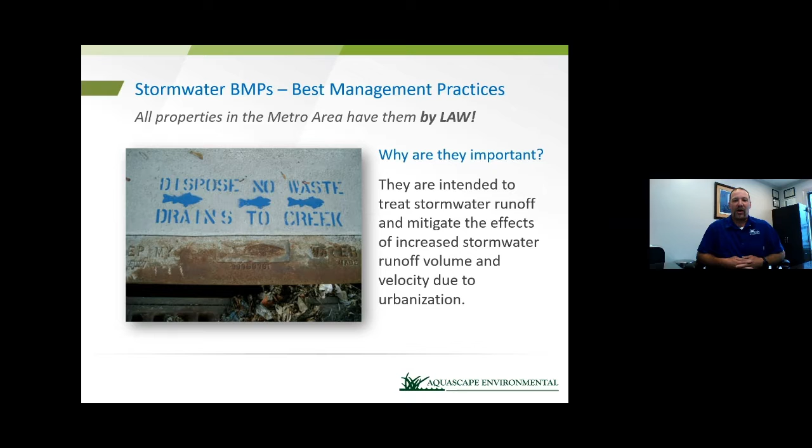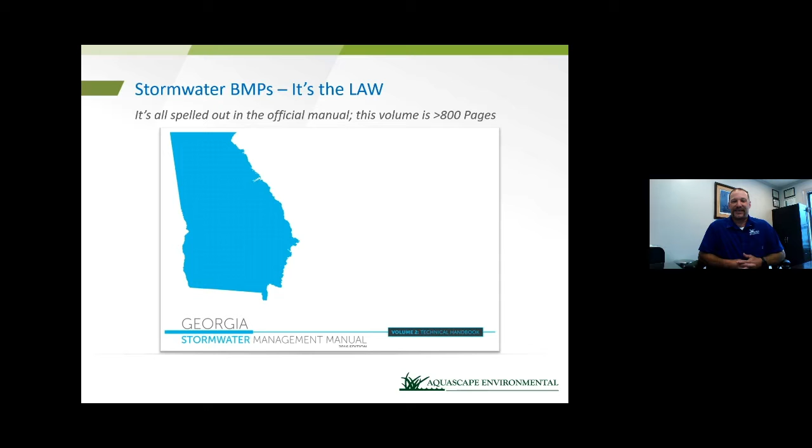Next slide, please. If you really want to get into it, as with everything government oriented, there is the official, they call it the Blue Book, the Georgia Stormwater Management Manual. There are several volumes, and you're looking at well in excess of 800 pages. It will spell out everything you would ever want to know and probably don't want to know about stormwater management. That's where it helps having a professional come in and assist you with this process, because that's kind of what they do and we do - we know the ins and outs of that process, and you don't have to go figure it out for yourself. Next slide, please.

But this notice to comply basically says that someone from the county has come out. There is some manner of either deficiency or notification, and they need you to address those deficiencies to bring the stormwater practices up to compliance.

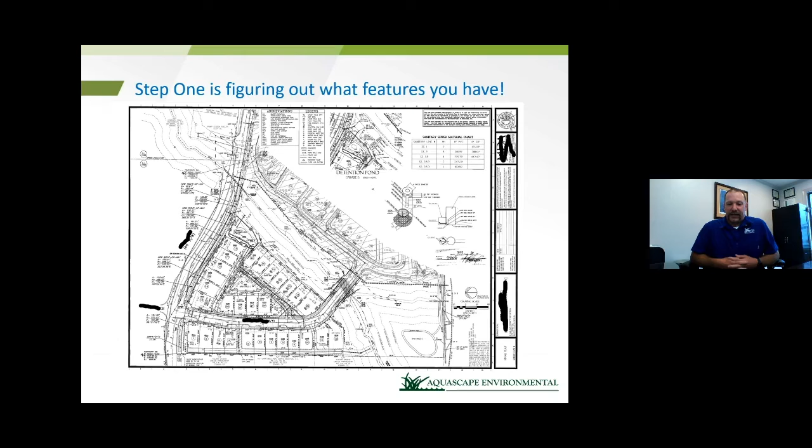So getting to the nuts and bolts of it, where we said it's very important, these are the two most common stormwater features that we deal with anywhere. And they are detention ponds and retention ponds, and unfortunately a lot of people use these terms synonymously. But they're very different. A detention pond, like it says in the slide, if it's a D, if you can remember the D, it is meant to be dry.

That means after a storm event like we had at the office today, within 24 to 48 hours, that pond should drain dry again. A retention pond is always going to have water in it to some certain elevation, except maybe in extreme droughts, but it will always have water in it. Now, the thing of it is, you can see in the slide, both of these have concrete dams, both of them have fences around them and all that, and concrete outlet control structures. So they look very similar, but the intentions of them are drastically different.

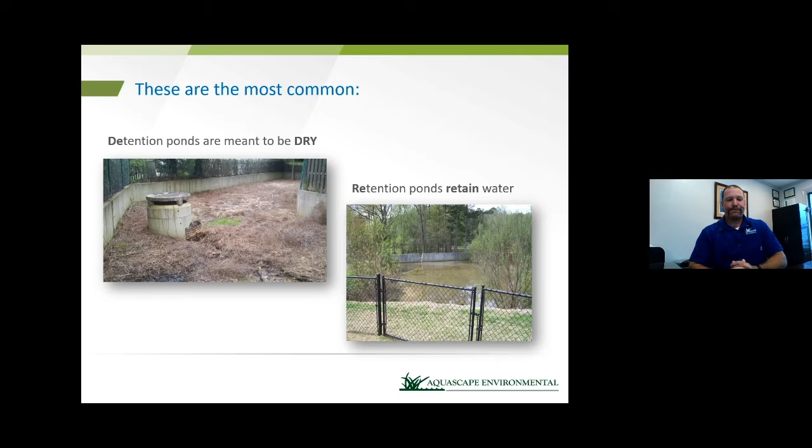Next slide, please. We said here the two most common are detention and retention ponds, but we listed a few more here that just kind of shows you that the inspection process, having a professional come out and inspect your stuff, it's not always just surface ponds. That's what's front and center, and a lot of people see those because they take up a lot of real estate in communities.

But you've got underground detention vaults, which are really big inside the perimeter in Atlanta. Hydrodynamic pre-treatment filters, those are becoming pretty prevalent. Stormwater baffle filters, bioretention, green roofs, all kinds of low impact development type stormwater infrastructure. So having a professional that can come out, even if you don't have a set of plans, they can come out and walk and assess your community, and really kind of do, for lack of a better word, a bit of sleuthing, and kind of follow the water and follow the gradients, and they'll find most of this stuff for you.

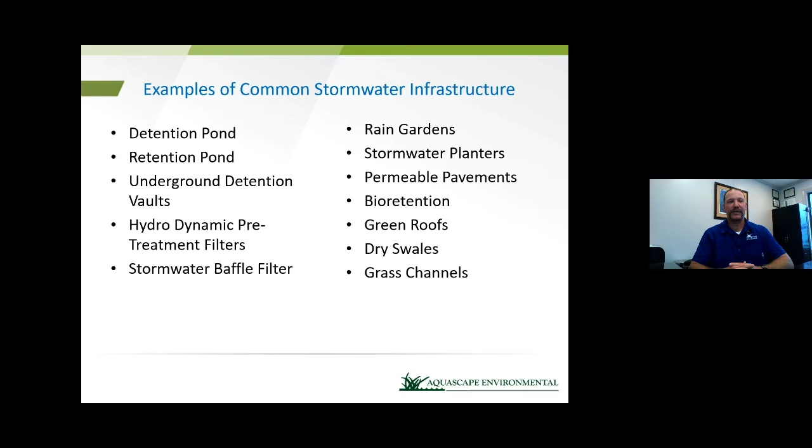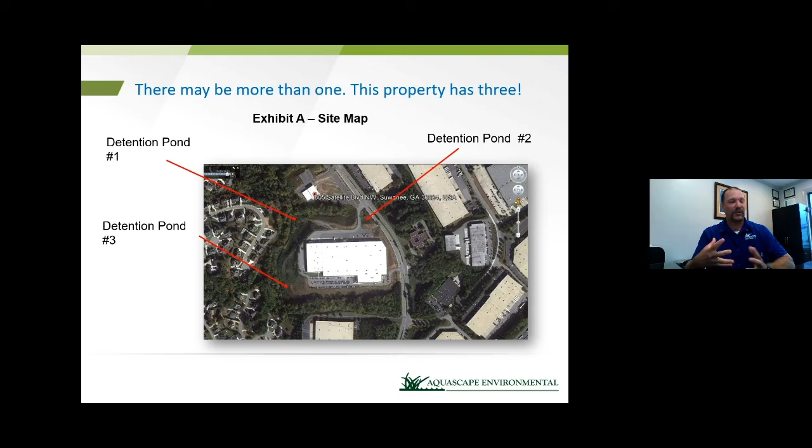Next slide, please. Like I said, be cognizant that there might not only be one structure that you're having to deal with. This is one building that is a customer for us, and it's a commercial property, and this one building has 3 large detention ponds because it's a massive warehouse. It's a little hard to see in the Google Earth there, but this is a big manufacturing type facility. And so you have 3 detention ponds, all in close proximity around the perimeter, but all 3 of those would have to be inspected separately and made sure that they're functioning properly to avoid any issues with stormwater backups or non-compliance with the regulatory community.

Next slide, please. Like we said, having a professional being able to look at this, these are becoming more and more prevalent. When space is limited, they put a lot of these things underground.

There are some different nuances to underground things, but at the bare root of it, whether it's an underground detention pond or a surface detention pond, they're the exact same. One just happens to be underneath a parking deck, a building, or sometimes a roadway, but it serves the same function as a surface pond, just saving space.

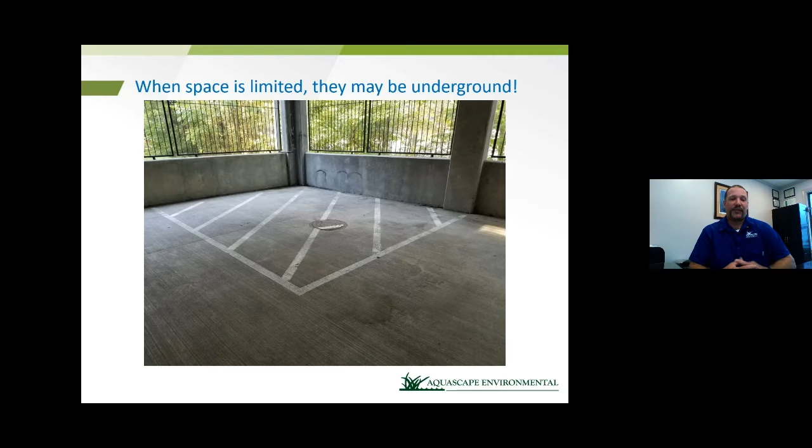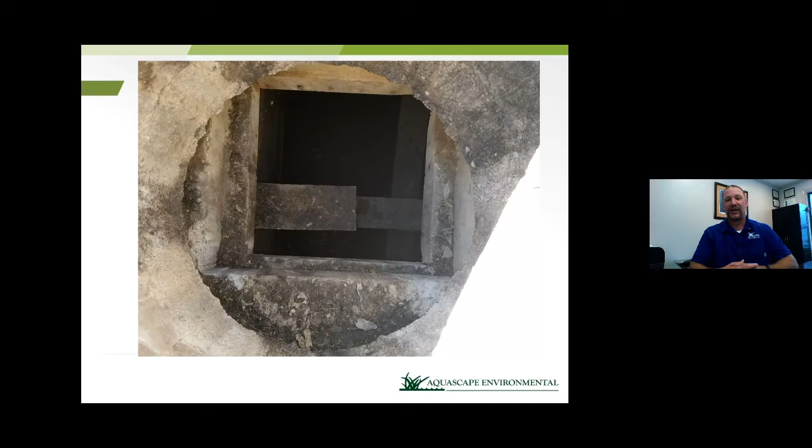They have their own complications for underground stuff. As you can see here, this is the only way in and out of the underground vault. It's a detention pond, and the weir structure in the middle is the outlet control structure. Any maintenance has to go through this manhole, so it has its own complications. Unfortunately, with these underground systems it's out of sight, out of mind. If you're not inspecting them regularly, bad things can happen because water backs up and people don't know about it until it's flowing out into the roadways.

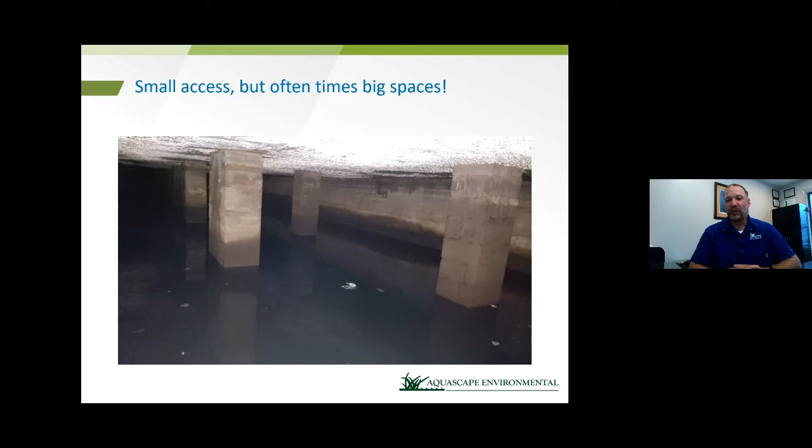So step 2, whether it's a regulatory agency or a private consultant like us, the way it's written in the Blue Book, you should be having a formal annual inspection of your stormwater features. You should look at them, preferably more often than that.

The book says you should visually look at them after every rain event, but that's a lot to put on your HOA president or even a building owner. A lot of times these are pushed off to remote portions of a property, so getting down into them every single rain event doesn't necessarily happen, but we really recommend, if nothing else, a once-a-year formal annual inspection.

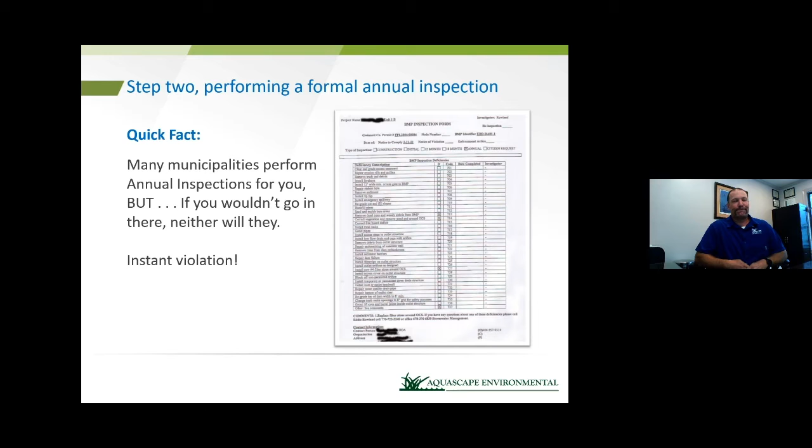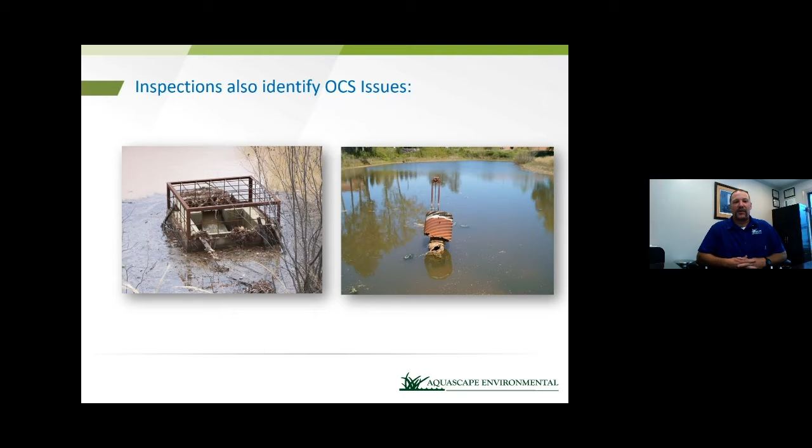The inspection process obviously is not just about vegetation, it inspects things across the board. One of the big things is the OCS, you'll hear that term a lot in this talk. It stands for outlet control structure. Basically that's the nuts and bolts of your stormwater pond, or really any stormwater control, because we're backing up or retaining water on a property and releasing it at a controlled rate. You need some type of structure to do that, so they will inspect those as well to make sure they're functioning.

I always tell new HOA communities or property managers taking over a community from the developer, this is one of the biggest ones. You want to have an inspection of those stormwater ponds before you sign off from the developer, because a lot of times that stormwater pond is serving as their sediment pond while they're building the neighborhood. If they haven't cleaned it out, as soon as you sign off, it becomes your responsibility. We can try to go back and get them to help, but good luck with that, unfortunately.

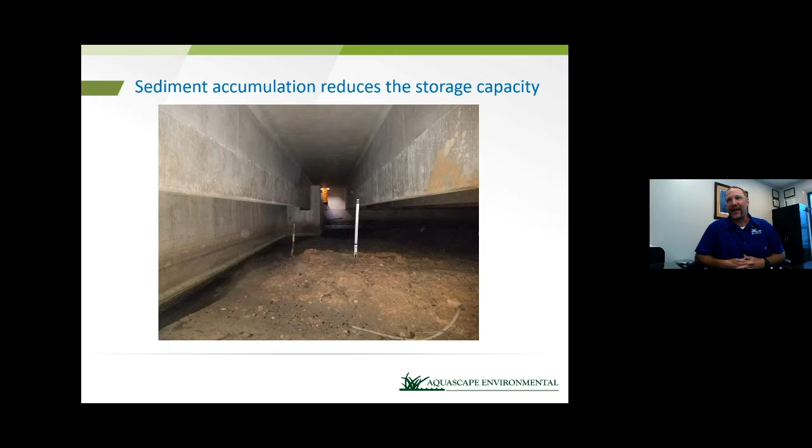Unfortunately, we live in an urban society. This is one of the big things even in our normal lake management duties that our guys deal with on a day-to-day basis. Stormwater features, especially your surface ponds or retention ponds, think of it as a bathtub. Everything that flows into there stays in there. The water can go out, but everything that goes down the drain gets caught in the pond, and a lot of times that's just bulk floatable trash and man-made trash.

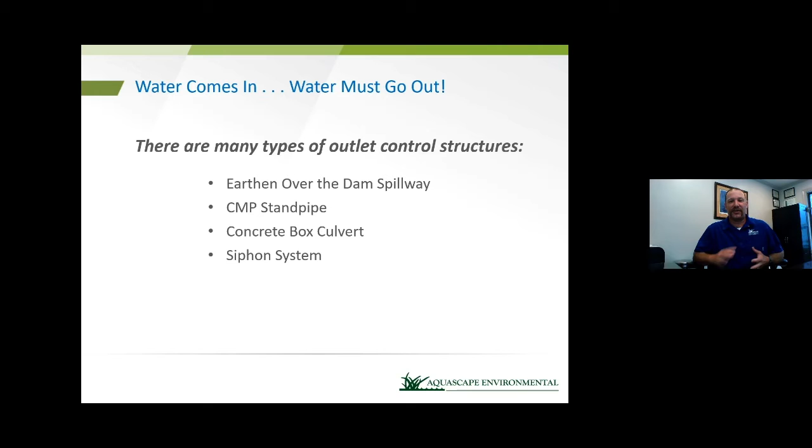There's all kinds of different outlet control structures. They can be corrugated metal pipes. You see a lot more concrete now because it lasts a little bit longer. You'll see PVC and poly extruded pipe that they're using now, which also lasts longer. But we still see a lot of corrugated metal pipe too, because it's also the cheapest option. But maintaining those spillways is critical. Key one, start there. If it's clogged up and they tell you it's holding water, we got to get the water out. Next slide, please.

But if we go back to our high school science class, a gallon of water is roughly 8.5 pounds. Most of your ponds, in the water industry, we deal with acre feet. So a foot of water over an acre, or 2 feet over a half acre, is an acre foot. An acre foot of water is 326,000 gallons of water. So you multiply that by 8.5, you could think of the weight. If you just have a foot extra of water on top of that outlet control structure because it's clogged up, the amount of weight and pressure that is placed on that system by simply not maintaining it correctly is, like I said, water finds a way and it will find the weak spots.

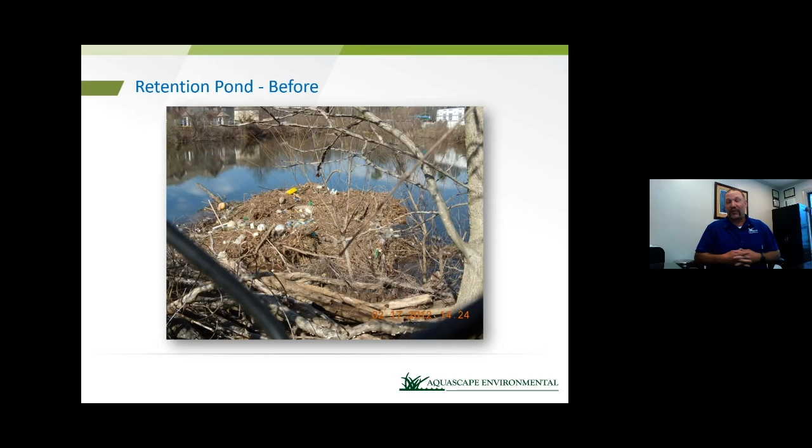Next slide, please. Just another example. This is one we got a call from this pond. We actually have started maintaining this one on a regular basis. This is in downtown Atlanta. They couldn't understand why the roadway was flooding after every rain event. Next slide, please. Exact same place.

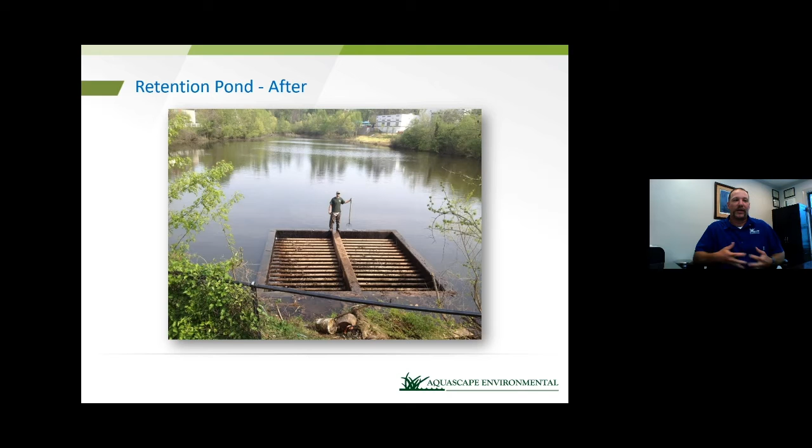This was actually an apartment complex that had changed property owners over the years, and they didn't even really know that this was there because it just had gotten covered and forgotten about. Again, that goes back to the importance of having these things inspected at least on a once a year type basis. Next slide, please.

Anybody was around the 2009 floods, historic flooding? Ignoring your spillway can be a big liability when roadways are involved. This was one of the pictures where we had to respond in 2009. In the upper center, you can kind of see a debris pile there. That's where the spillway is. It found a way through the dam and washed out this roadway. Unfortunately, in this case, this was the neighborhood's road. It was basically in the center of the community. It was a several hundred home community, but they owned the road.

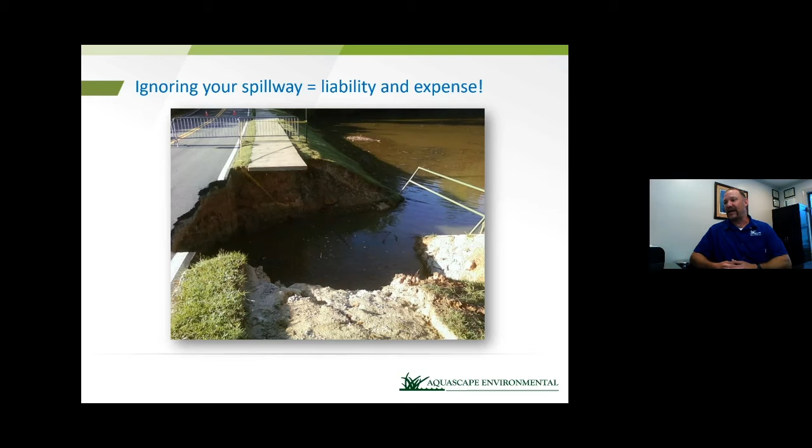I mean, this is a massive expense. Now, luckily, the city stepped up and shouldered a lot of it with them and helped them out. In some places, like City of Roswell, they don't allow dams to be roads anymore because of situations like this. But you can think of the expense, and all that came down to was not maintaining the spillway. Next slide, please.

We get asked a lot: can we just leave it flooded? It looks better. This isn't the best example, but we have a good before and after on this one. This is supposed to be a detention pond, but when it flooded with 5 or 6 feet of water, now they've got somewhat of an amenity. They'd rather see a pond there than just a vegetated dry basin that a detention pond would be.

But unfortunately, detention ponds and retention ponds are fundamentally different when it comes to construction. A dry detention pond is only supposed to hold water for 24 to 48 hours, so the developer doesn't have to put as much engineering and detail into the dam structure itself because it's not supposed to hold water for very long, whereas a retention pond is.

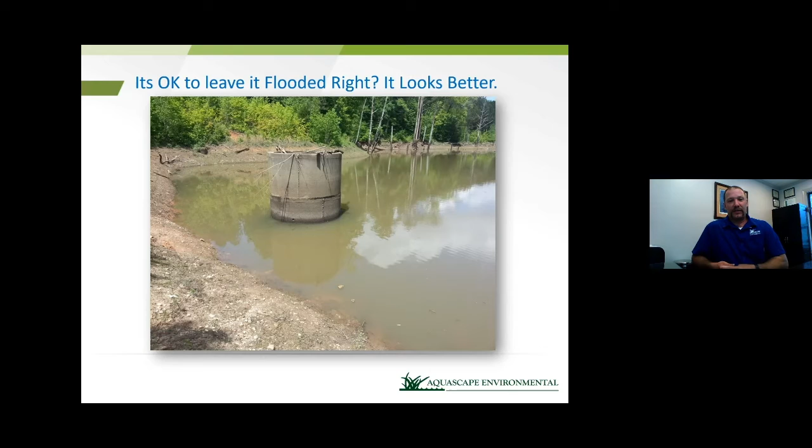When you leave them flooded, this is the same place, and this is what happens. Basically, the entire dam catastrophically failed. Water found a way, had to get out, put a lot of pressure on it. Monday, at least up here in Woodstock, we had 4 inches of rain in several hours. It was just a massive amount of downpour in a short amount of time, and the dam just couldn't take it.

I can tell you from experience of having to repair these, fixing a dam when it gets to a situation like this and fails is very expensive. What a lot of people don't think of is that all that dam material went somewhere. In this case, it went down to their neighbor's pond. So they not only had to pay to fix the dam, they also had to pay to get the sediment out of their neighbor's pond. Almost a double whammy of expenses for something that basically could have been avoided if they'd just maintained the spillway a little bit better.

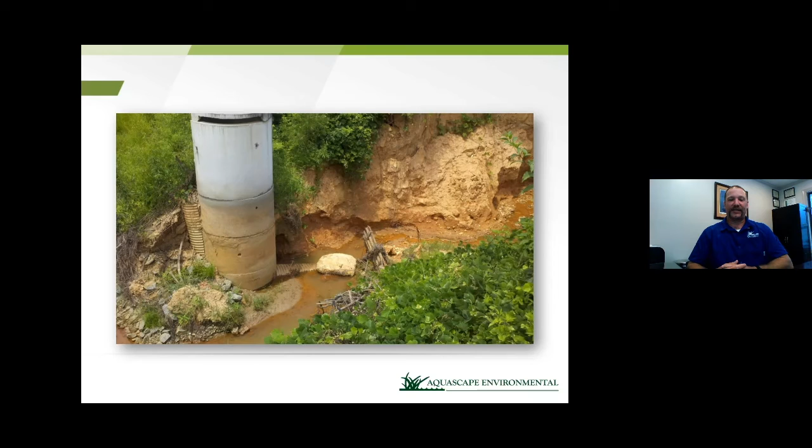A lot of people see concrete spillways. Even concrete spillways, if they're meant to be dry, are built a little bit different than the concrete dams meant to hold water all the time. In the case of this one, it simply fell over. You're talking a big expense. Concrete's not cheap nowadays, especially the way we're building roads and all that, and even finding it is hard, but repairing something like this is quite costly.

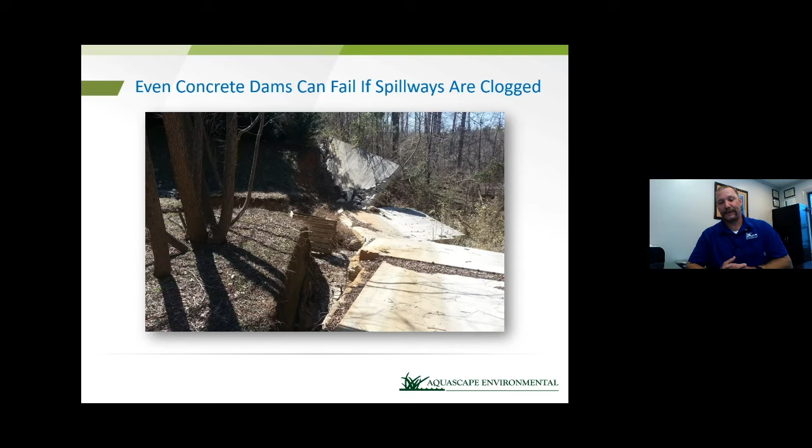This is a little more common with concrete detention ponds. Water just goes underneath them. The pressure finally gets through because they don't have to pour the footings as deep for a dry pond, but repairing this after the fact is also difficult. They kind of have to inject concrete and patch it up from that respect.

The spillway is not the only thing, but you also got to consider the BMPs. Like anything, like your car, brakes have to be replaced, tires, flush the radiator from time to time. A stormwater feature is the same way. We've got to remove the trash, maintain the vegetation, and the BMPs, or best management practices, that control the water leaving that site, those have a lifespan as well.

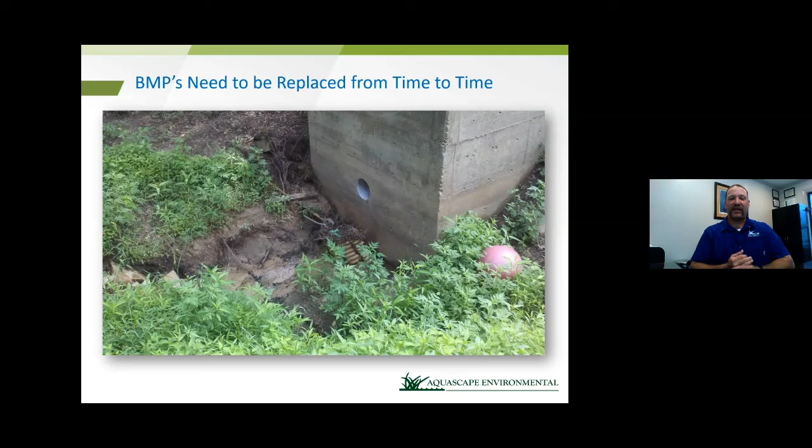It just takes maintenance from time to time. That's the same structure - they've got fresh rock in, they've removed some of the sediment, they've reinstalled the metal half-round retrofit on it, and now this thing is functioning properly again.

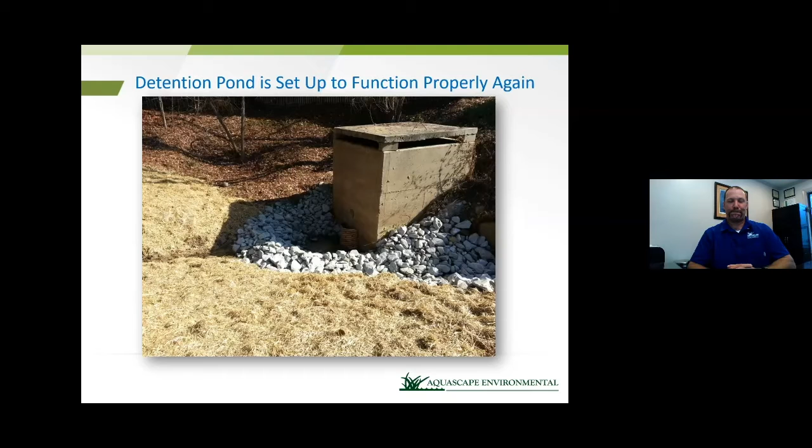After we've dealt with the spillway and the BMPs, the next thing you want to address is infrastructure issues. A lot of times that's aging pipes. Unfortunately, we still see a lot of corrugated metal pipe - it's the cheapest. I hate to say that, but the cost difference of that versus reinforced concrete pipe is pretty dramatic. So if you can get away with it... but this stuff has a lifespan, manufacturers generally say about 25 to 30 years. So older communities, you've got to look at these pipes. This stuff can be repaired in place in most cases, but once it fails, a lot of times the only way to fix it is to pull it up, dig it up, and replace it.

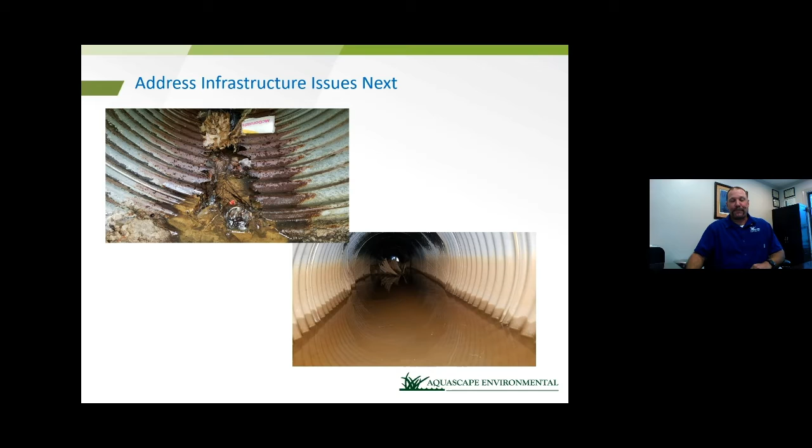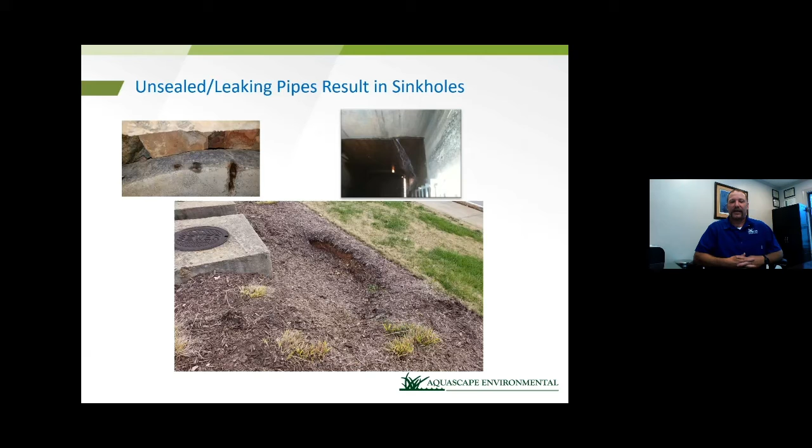A lot of times those failing or leaking pipes, especially like the bottom picture there that's underground, present themselves as little leaks over time that end up showing up as sinkholes, soil loss, or piping around structures. Addressing those on a periodic basis, a lot of times that's just hydraulic cement that can seal up those leaks, and fixing it early can avoid a big expense later down the road.

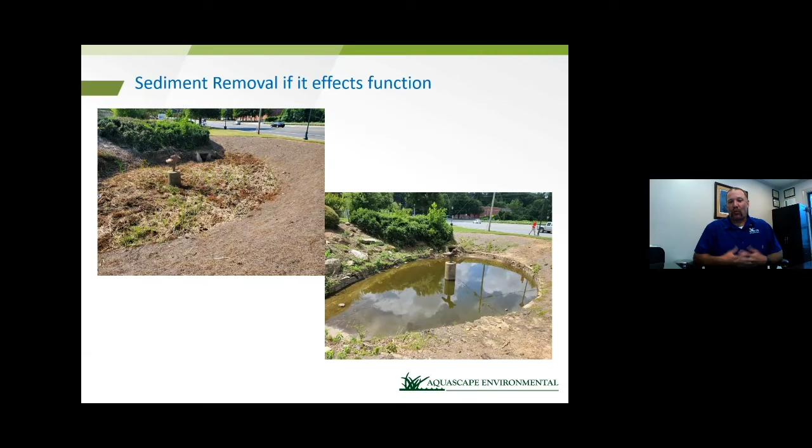Again, sediment. When it comes to volume, you can see in this case, it's a small pond, but it works to make my point of when this pond is functioning as intended for its stormwater function, it wants to hold a volume of water after a storm event. You can see in the upper left, when it's full of sediment and vegetation, it no longer functions. So water is basically coming in and going straight out, and you have a downstream effect from that. So this is a violation here.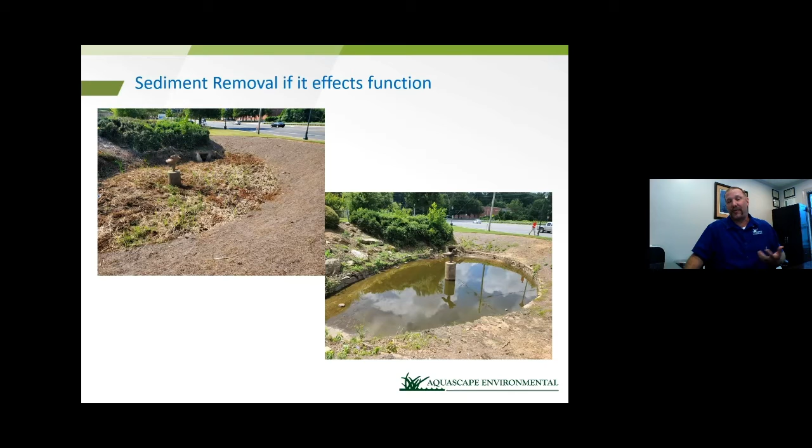And like we said earlier in the talk, sediment's expensive to get rid of. So the more you can periodically maintain, getting out small volumes versus cleaning out the entire pond, the better off you are in the long run.

Routine maintenance with vegetation. A lot of times when we get these cleaned up, what we like to tell customers is best case scenario, we would cut them more often, but at a minimum, cut them twice a year, once in the spring, once in the fall, and you'll stay ahead of most of your vegetation issues.

Like we saw earlier with the one that was fully grown up, bringing that one back to a maintainable state, getting rid of all the larger trees and woody overgrowth, you can be talking, in some cases, tens of thousands of dollars to cut, chip, and haul off that material versus maybe $1,000 a year every year. If you haven't touched it for 10 years and it costs you $10,000 to $15,000 to bring it back to a maintainable state, it's just better to maintain it on a regular basis.

In a lot of cases, this is not something that necessarily has to be a technical person that can do this. A lot of your landscapers can do this because they're already on site at larger communities, out there once a week addressing other parts. You can add it into their contract to maintain at least the vegetation, the mowing of these surface ponds, and you're ahead of the game.

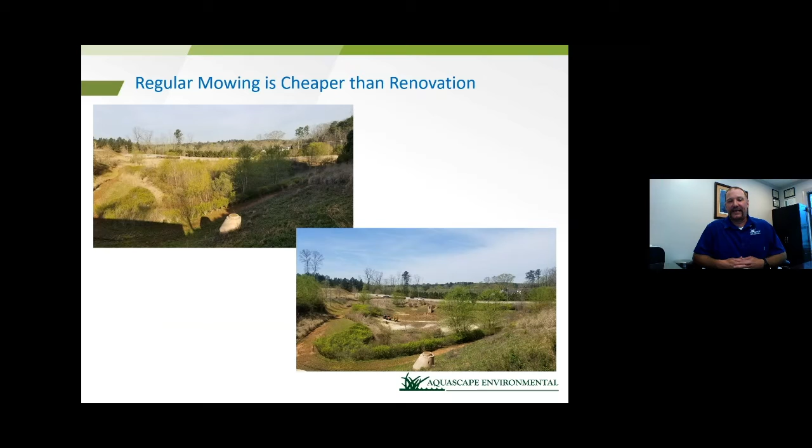I hate to say it because I told you they could help you as well, but sometimes our landscapers are our biggest enemy. You've got this stormwater pond, and it's an easy way for them to blow leaves into the storm drains, blow leaves into the ponds, dump your crepe myrtle clippings over the fence into the banks of the pond. All this stuff leads to blockages of the pond. So we can educate your landscapers, whether commercial or residential, that these aren't dumping spaces for their landscape debris. The better off you'll be in the end.

Talked earlier, these are becoming pretty prevalent. These are called pre-treatment filters. It's a way of controlling stormwater before it gets to your stormwater control. So this particular one here is a hydrodynamic separator. Basically, the water comes in from your curb gutters, swirls around, and it basically drops out the sediment, drops out your floatable trash, and then nothing but clean stormwater is going to your retention and detention ponds. In a lot of cases, we'll see these in front of bioretention areas as well. So it's a lot easier to clean this than have to clean and renovate the detention pond, let's say.

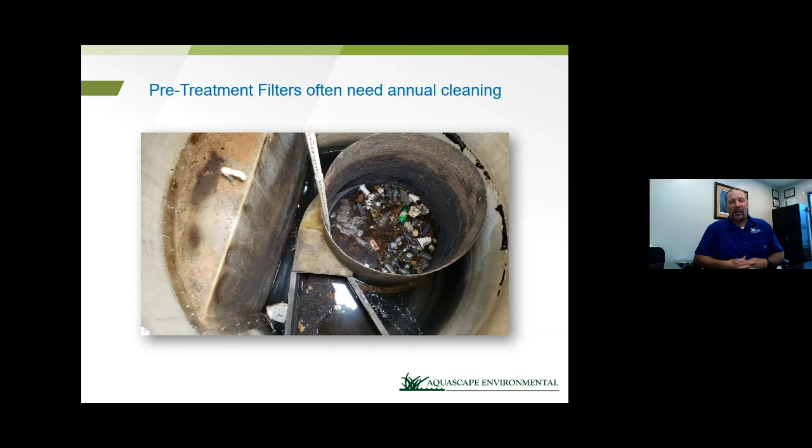Don't forget safety, that goes all around. This picture here, that's about an 8-foot drop. The picture doesn't do it justice. I know when I was a kid, this would be a magnet for me to go play after school and build forts and do whatever. But from a liability standpoint, hate to say it, but we're a litigious society. Keep the gates locked, fence them if at all possible, and maintain access control to these places.

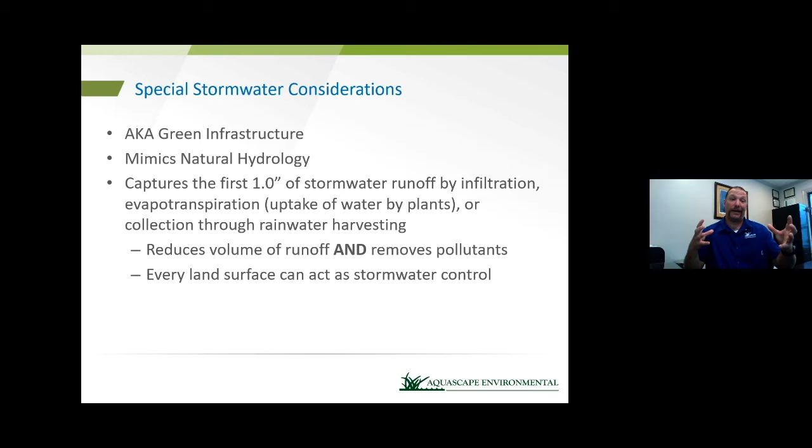Special considerations - there are other ways of maintaining stormwater besides retention ponds, detention ponds, and underground vaults. This is considered the green infrastructure or low impact development way of handling stormwater. We're not dealing with all of the stormwater, just that first 1-inch runoff. A lot of times these practices are used inside the perimeter, where you already have urbanization and we're redeveloping a section and just don't have the space for a big underground vault or surface pond. So we can handle a lot of that with green infrastructure.

Here's a bunch of practices, all from the Atlanta area. You can see City Hall has a green roof. A big one throughout Atlanta is pervious pavers - very cool the way they work. You could go out there with a fire hose and pour it wide open on that pavement, and it would disappear until the underground section gets full. Bioswales, rain gardens, bioretention - really neat, and they work really well.

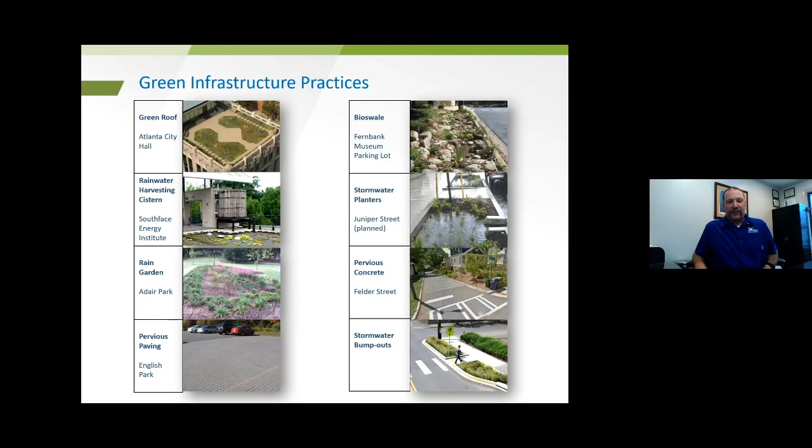Unfortunately, they're kind of harder to find. This is a perfect example - everything where you see the brownish pavers there, down at the City of Atlanta school. That's all pervious pavers. So basically, that is their stormwater practice.

It needs to be inspected regularly. What surprises people, as little as we get it here, is that one of the biggest killers of these practices is when we get snow and ice, because we come out with the gravel and the salt, and it immediately goes in and clogs these pavers. So you've got to get street sweepers and whatnot. But like you see, it just looks like a normal roadway. Unless you're familiar with this, you wouldn't even know it was part of the stormwater infrastructure until things started flooding a little bit.

Bioretention pond - very similar to a detention pond, other than basically that surface. There are layers of engineered soil under there that help water infiltrate, about 5 to 6 feet of engineered soil. Really cool - kind of like a big rain garden is how those work.

Believe it or not, depending on how you look at them, one of the biggest users of these is Walmart. They've got super Walmarts everywhere with massive parking lots. You can see these vegetated bioswales - unless you knew better, you would never know that's part of their stormwater infrastructure for those sites. It just looks like landscaping. But that's their way of managing stormwater runoff to meet requirements from the city and county.

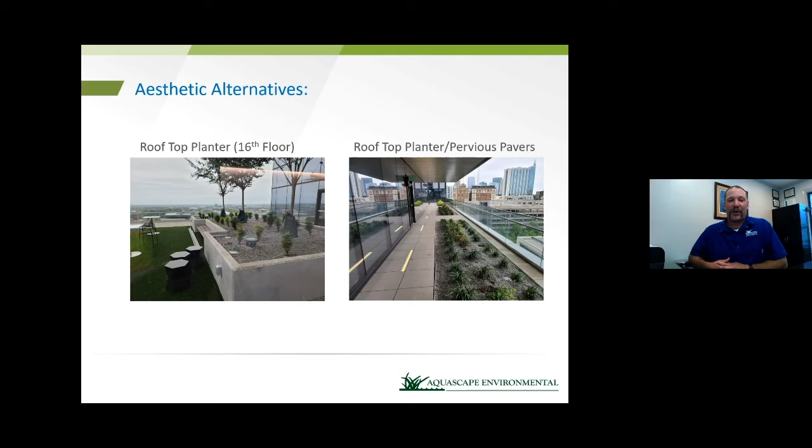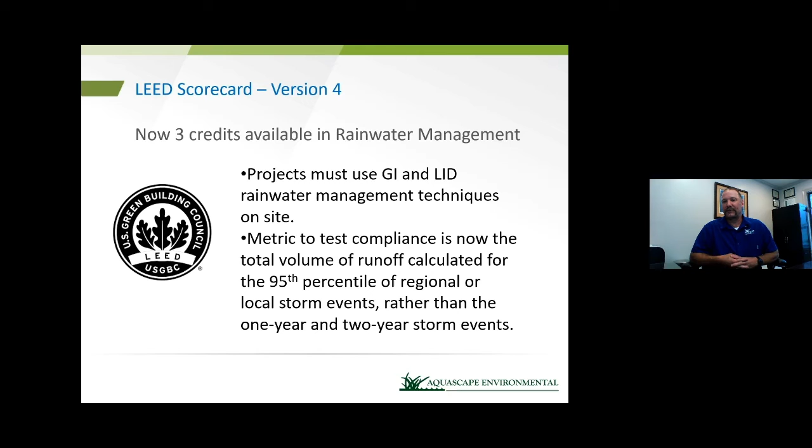With a lot of that green infrastructure, for those of you with commercial buildings or large commercial sites, you do get LEED credits for having that stuff and keeping up maintenance records showing it's functioning properly. You get credits for that. So those of you familiar with the LEED process get a bit of a bonus for keeping up with that stuff.

That's the end. Hope we taught you a little something this evening about stormwater and stormwater infrastructure. Unfortunately, it's not flashy - it's not the tennis courts, it's not the pool. But by law, it's something you have to maintain. If you get that notice of violation or notice to comply from the city or county, they're willing to work with you. They know we don't have an endless amount of money with communities to repair and bring these things up to compliance immediately. But on the flip side, if we go build a new pool, they're probably not going to be as lenient on that stuff. So again, it's not flashy, but when you're dealing with water, it's really important that we maintain these things properly. Hope you learned something.